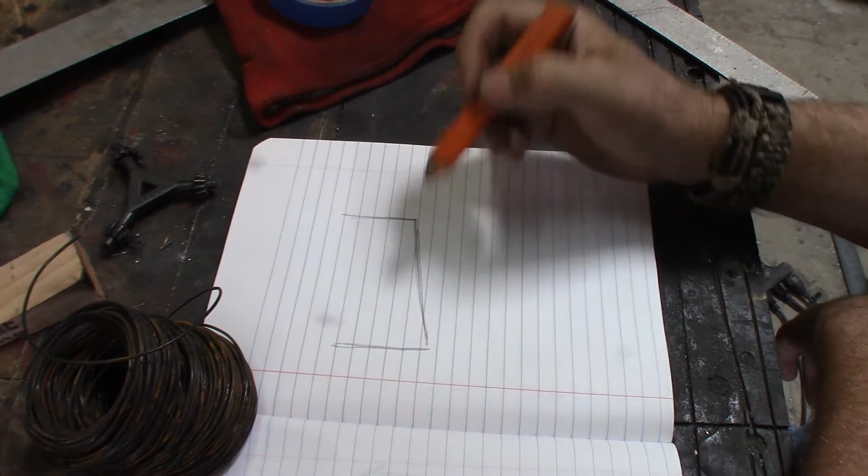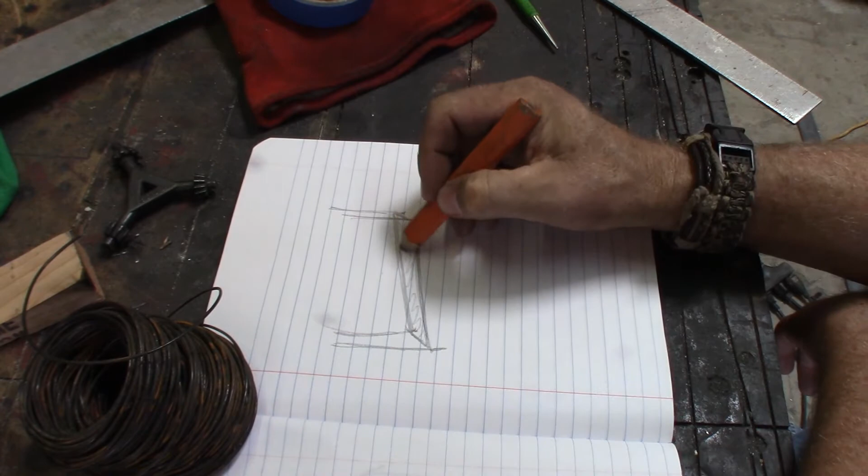I need to make a firewood rack for the house. I've got a lot of stuff going on here in the shop, but this is definitely one that shouldn't take me too long. I've got a few extra materials laying around the shop from other projects. I think I could probably find enough parts and pieces to do a basic rack to put firewood in.

Maybe put a little bit of a slant on the roof, to keep it from getting damp or wet on the slim occasion that it does rain out here in Phoenix. Why we call them monsoons, I have no idea.

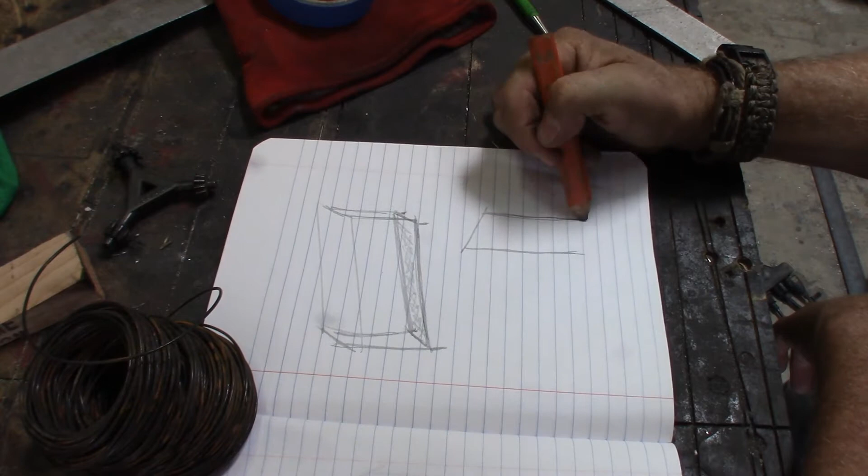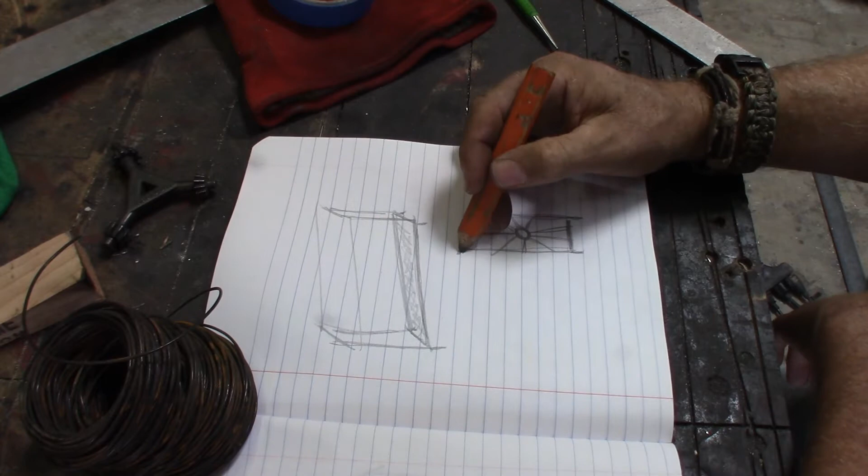Alright, so let's see, we'll put a slant roof, upward supports, the legs, the bottom. Oh, maybe we'll do a little bit of a design element here. Ooh, getting fancy. This is how my projects kind of spin out of control, because then I start getting a little crazy.

Alright, yeah. Firewood rack.

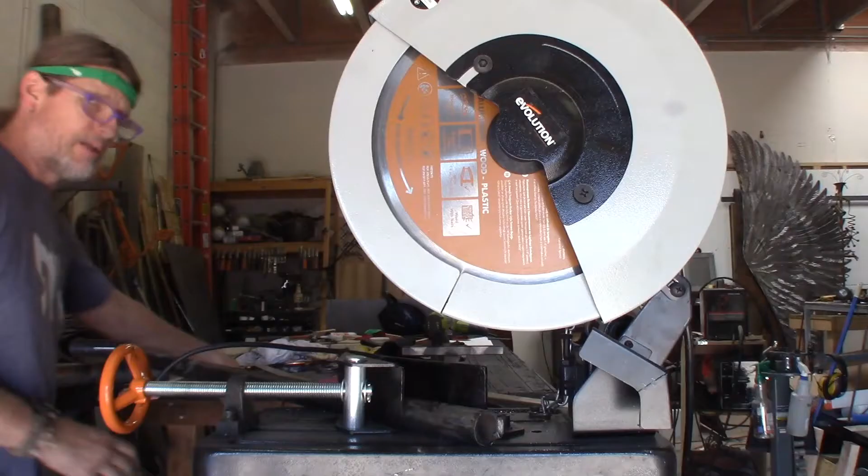Now I gotta say, this is probably one of the best investments that I made in tools for this shop. This chop saw. I used to use a friction type chop saw, and then I heard about the blades, so I bought this one from Evolution Tools, and it has been bomb. It really speeds up my work.

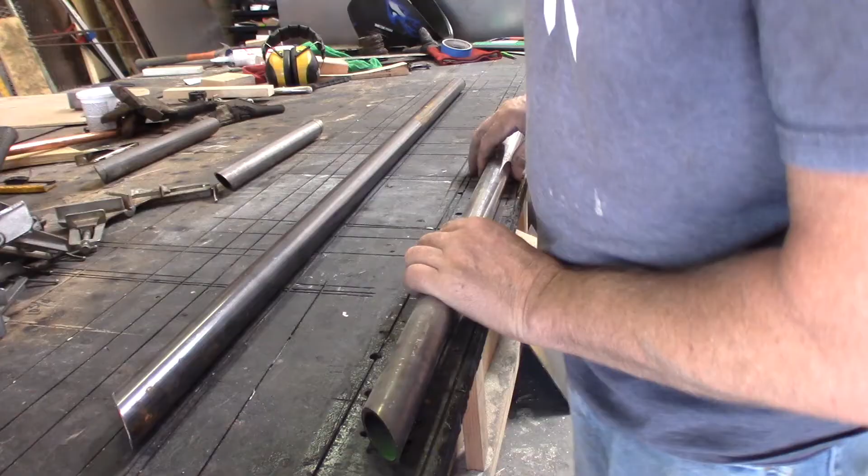One of the things I notice in doing things with round pipe is making sure you get the 45s cut on both sides evenly. I'm sure there's something out there for this. I don't know what it is, but I suppose I could look online and find out. That's the one thing that kind of drives me crazy.

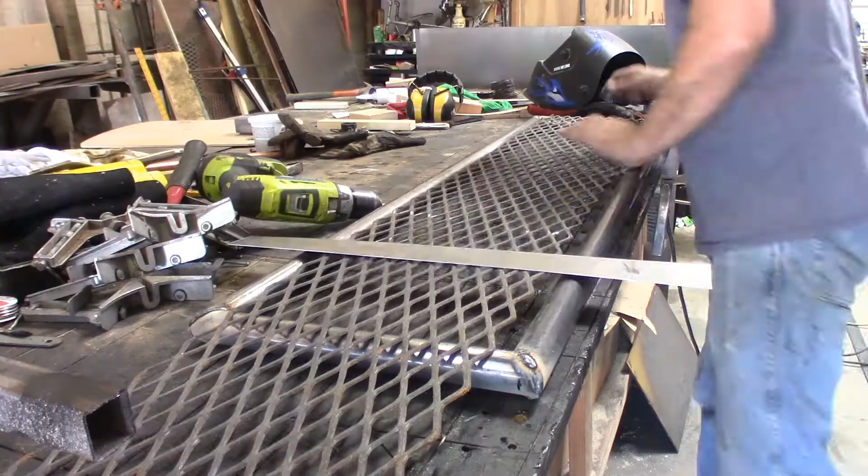Alrighty, so we're going to add a little bit of expanded metal here. That way, if I have some smaller pieces of wood, they don't fall down underneath there. I want to keep it up off the ground because here in Arizona we tend to get a lot of scorpions, and if there's wood on the ground, scorpions like to get in and underneath that. I've been stung by those suckers twice, and it sucks.

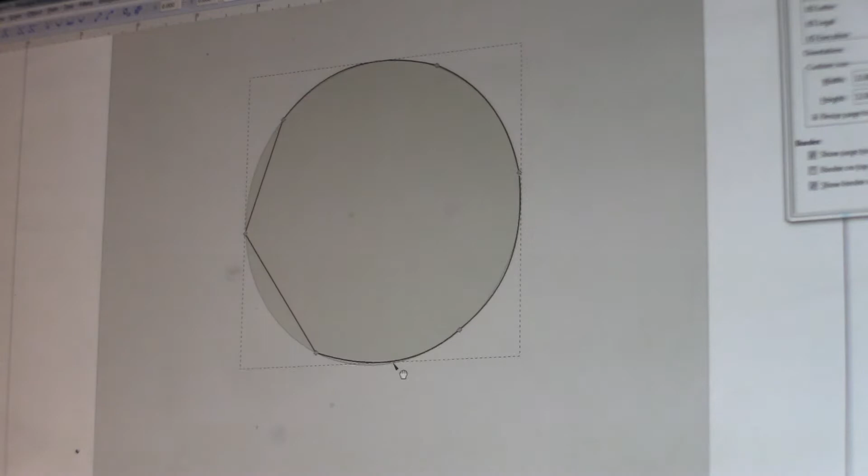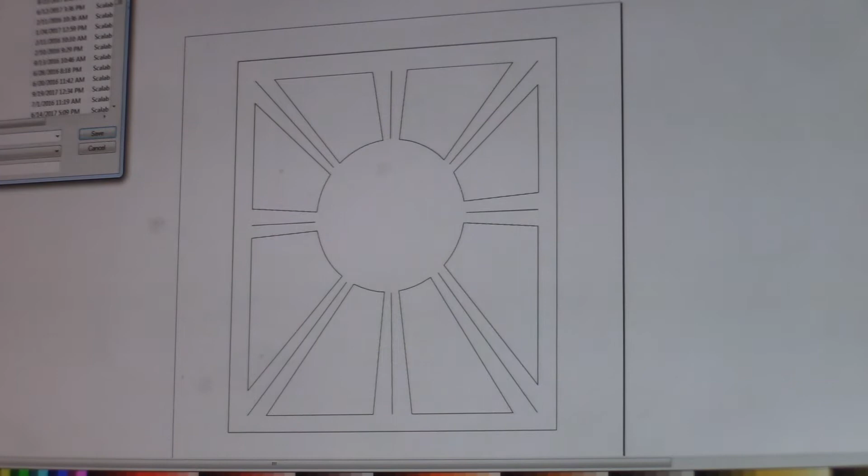Okay, so this is my design. I use a couple of different geometric shapes like squares and circles, and then I trace them. Once I've traced them, I get rid of the circles and squares and all that, and what's left is this line drawing. From here, I have to save it as a vectored file, or what they call an SVG file. Let's call this wood design, and we'll save it there.

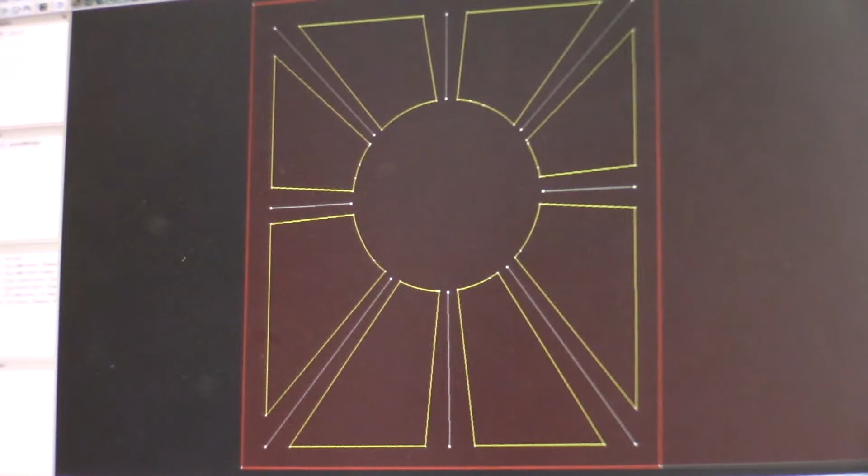Then I have to open up, well, this is another project I was working on, so let's close that out and open it up again. It's called SheetCam. We'll import our wood design. And there it is. It goes through, and I have to take a look at a few things here. So this is the design. Now I want to apply an operation.

So I am going to use some thicker metal than I have before. This was a 22 gauge. I'm going to assign a, let's see, that's a 10 gauge. Yeah, 10 gauge should work. Look at speeds here. Let's see, yeah, that should be good. Alright, so 35 inches per minute is the feed rate. Alright, let's do that.

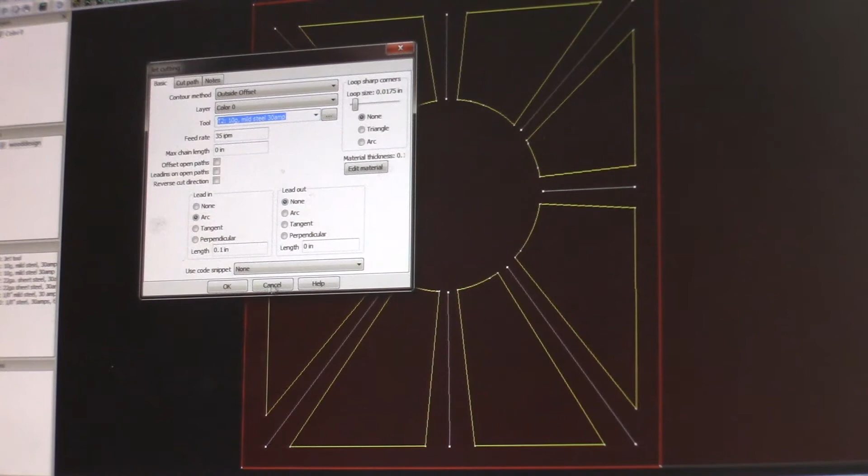So that's going to show the pattern in which the CNC will take. Now I have to run what's called a post processor, which saves it as a G code or tap code, whatever. And I open it up in another program. So let's close this file. Do we want to save it?

It didn't ask me. Okay, great. So let's go ahead and load the G code for the wood design. So yeah, it's a tap file.

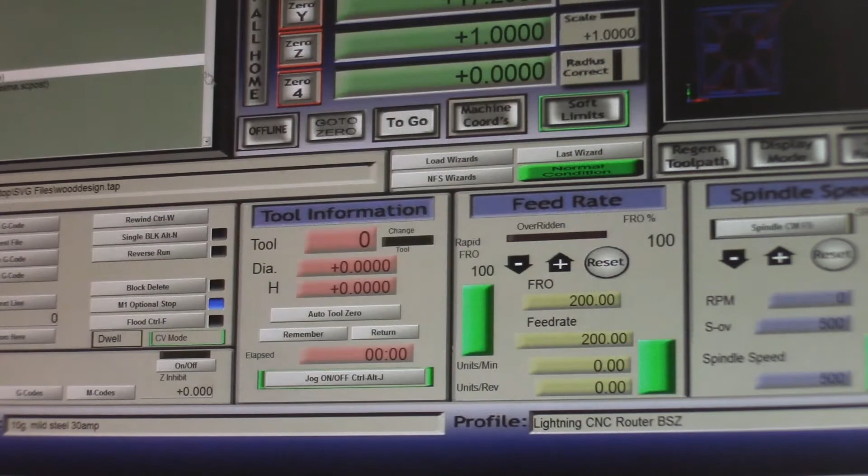All right, now I don't know if you can see that here. Let's, all right, sorry about that. I'm gonna get in here and kind of show you. All right, so there's our design.

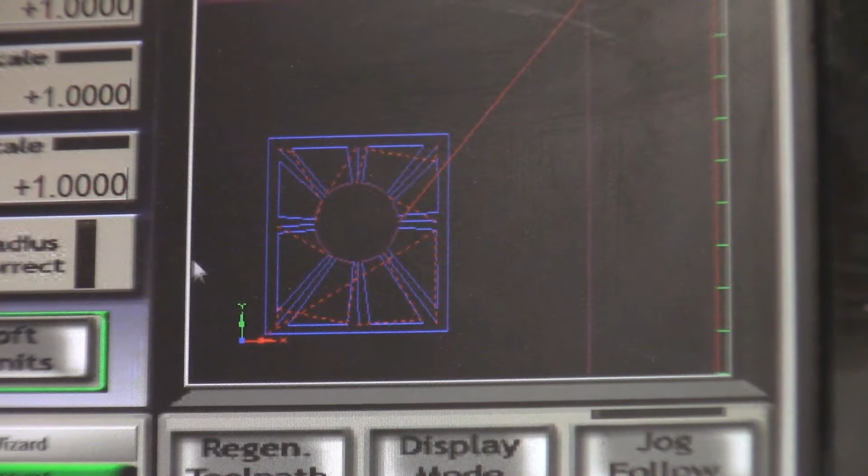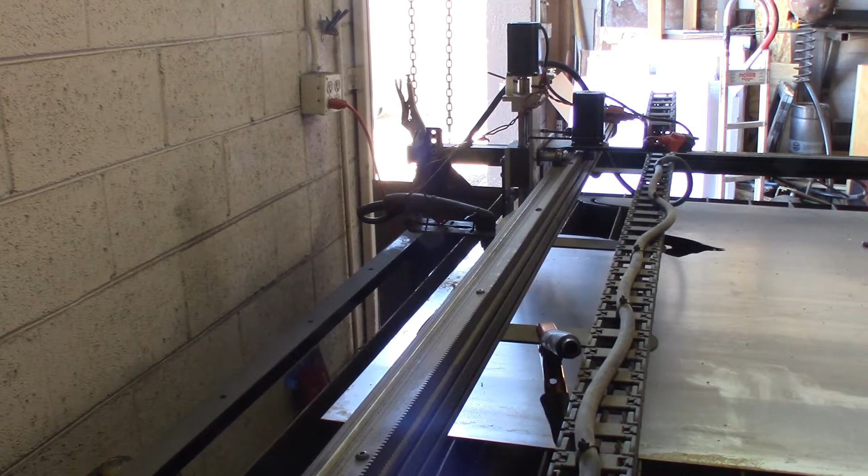I have to now kind of load it up to the XY axis. So what I need to do now is I need to position the machine so that it has a 0 setting. So basically what I'm doing now is I'm just setting up a starting point, or what they call the homing position. There we go. Okay, so these are the coordinates that I've just set.

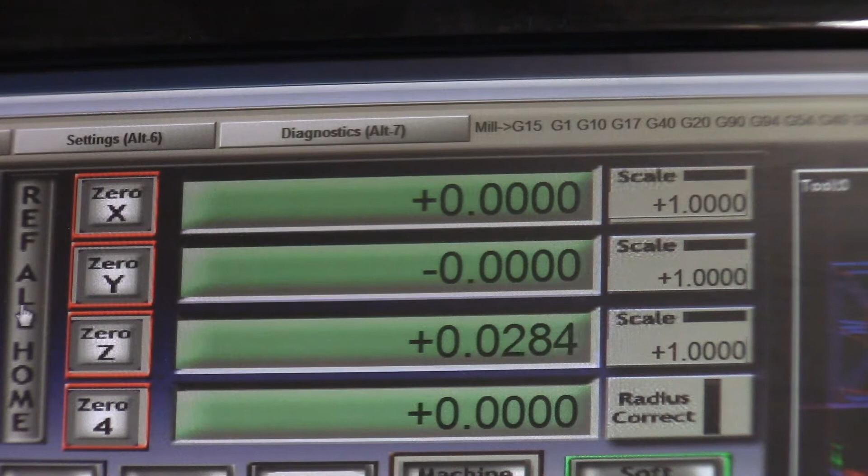So I'm going to zero everything out, and that becomes my new 0. I'm going to reference this home and have it go to 0. All right, so the machine is zeroed, the coordinates are set.

Now what I have to do is, one, I'm going to take you off the tripod now. So the machine is set and ready. One of the things you have to do is you have to ground the piece of metal that you're working with, so that's your ground.

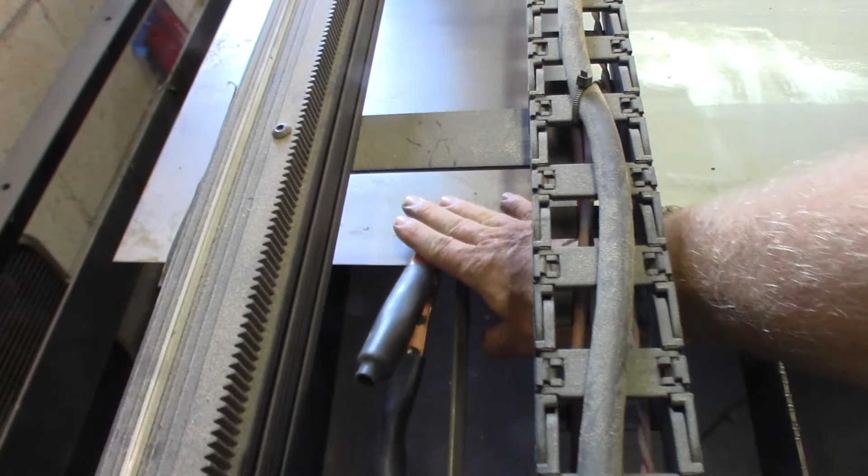All right, this is my machine. Shows that I'm on. All right, this is my air control, so you have a compressor running into that.

Let's double check. I think we're ready to start. Okay, so now all I need to do is just push the button and it starts. Shield your eyes. Okay, sorry about the compressor.

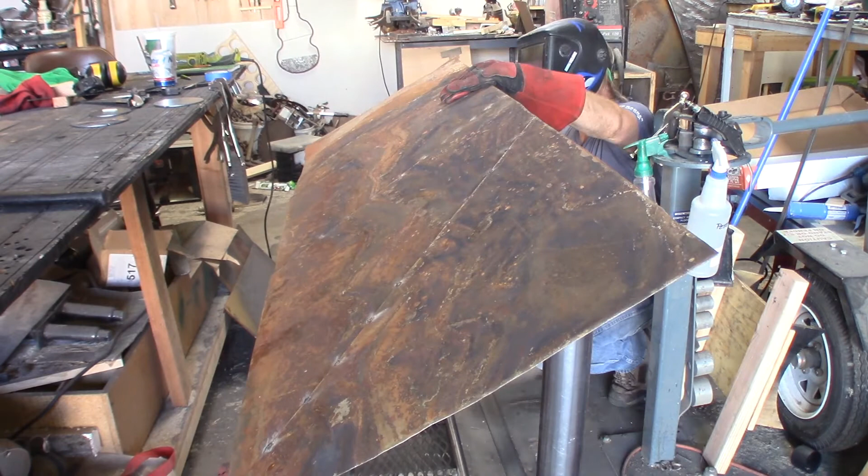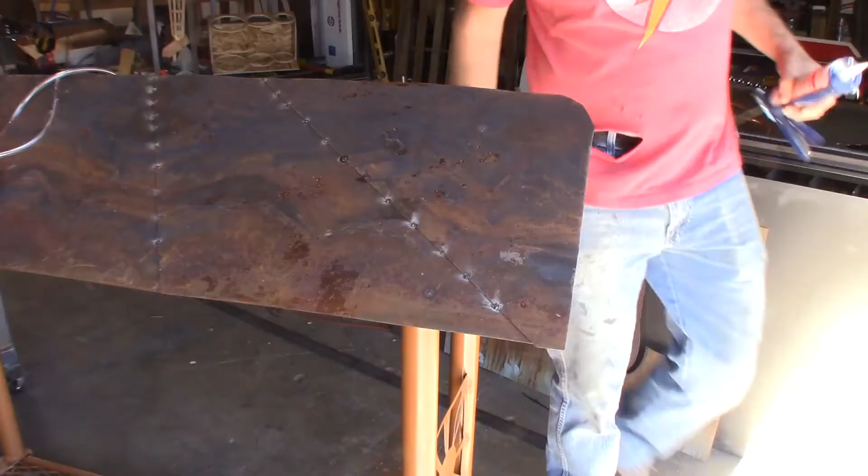Alright, so it's a little bit of a sharp edge here on the sheet metal. So I'm going to add in just some rubber tubing just to kind of cover up this area. This is just silicone. That way it stays on.

The music in the background - this is what happens whenever I'm not recording, actually. I got the music playing all the time. Because who wants to be in a shop that is dead quiet? And it's still hot enough here in Phoenix that I usually run the evaporative cooler, but I have to turn that off when I'm recording because in some of my videos, as I'm sure you've heard, it's pretty loud. And it just gets a little bit distracting when you have that loud noise.

I just picked up some tubing over at the local hardware store, and then just took my knife and just split it. Now I know that you could probably go to an upholstery store, and they will probably have tubing that's already split. I think they use it for like door frames on cars and things like that.

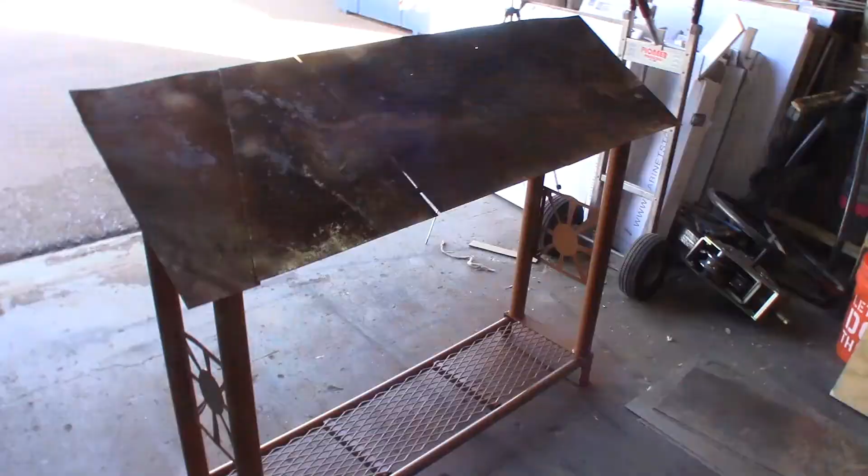Alright. Now we just got to get it over to the house. Alright, check it out. The wood rack is in its place. Got the little design there.

The more I look at it, it kind of looks like a Japanese flag or something like that. But hey, you know, I was in Japan for a while. I thought that was kind of cool when I was there. So hey, a little tribute to them maybe. So there you go. Yeah, wood rack complete.